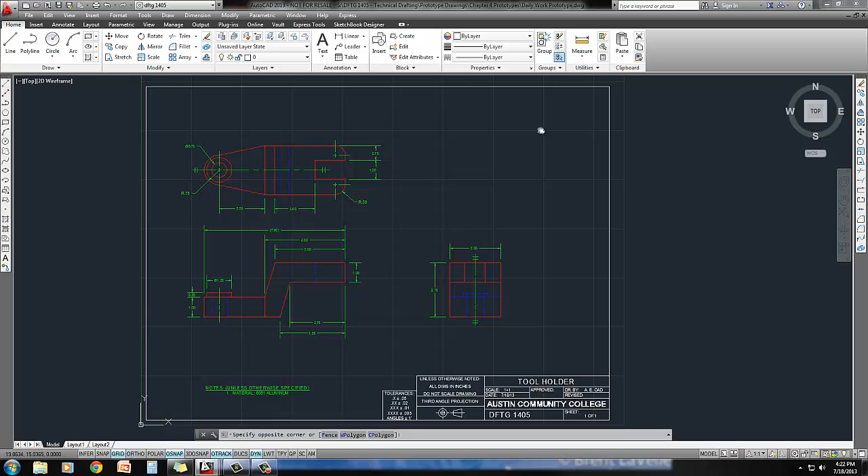And now we're going to move along. Even though the isometric is ultimately going to go right here, I'm actually going to draw it off to the side, just so I have a nice blank area to do it in.

So the book wants me to set up the snap type to isometric, so I'm going to right click on the word grid, go to settings, change it from rectangular to isometric snap, and I also need to turn my ortho on. Anytime you're doing isometric, it is really important to just leave ortho on. You don't want to accidentally draw lines that are not at the right exact angle.

So one step that the book does not have, and this is just something I like to do, so take it or leave it, I like to create a couple of new layers here. So I'm going to create a layer called construction, and I'm going to create a layer called isometric. I'll make my isometric red, and for some reason I like my construction lines to be yellow. I also like to load in a new line type called dot. For my construction lines, you can do whatever you want. It does not have to be dot. That's just my personal preference.

So I'm going to set construction current, come back to this drawing, and step 1 wants me to create a box. This is just going to be a bounding box that is going to be 7 by 2.5 by 2 3/4. So I'll just start drawing a line here.

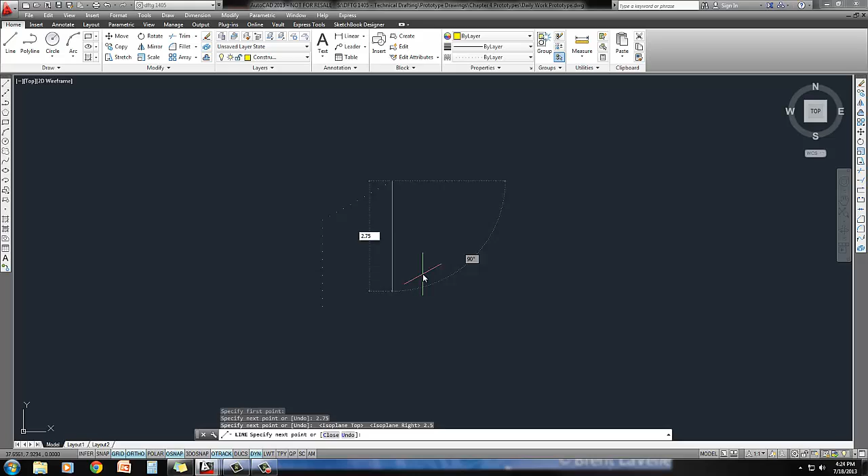I'm going to come straight up a distance of 2.75. Toggle with my F5 to get the cursor to be at the right angle here. So this is going to be 2.5, then down 2.75, and then back over here 2.5, and then I'm going to come over this way a distance of 7, up 2.75, back over 7.

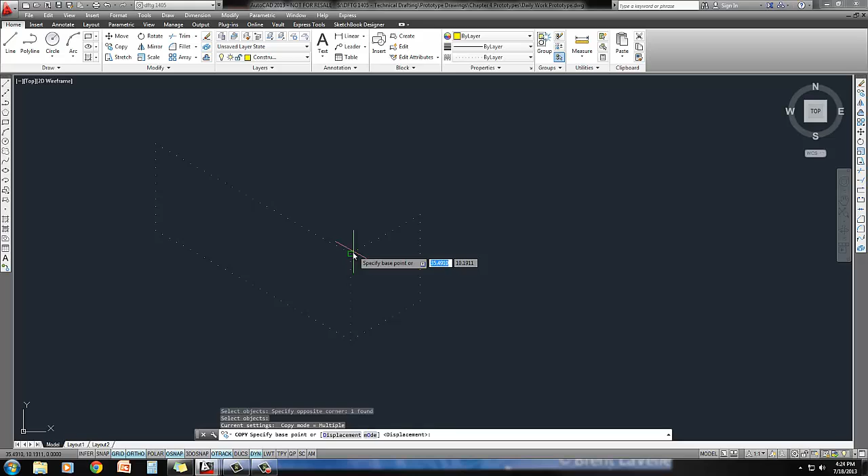And you can either draw those lines from scratch or you could actually use your copy command. So once you've got each of those lines drawn, each length that you need, you can actually just copy what you need straight back. So that's totally up to you. Draw them from scratch or copy them, that's fine.

So now that I've got my bounding box taken care of, I'm going to start constructing the actual object itself. So I'm going to set my isometric layer current and start drawing. So at step 2 it actually has a little picture below, but I do often refer back to the original sketch when I'm doing this.

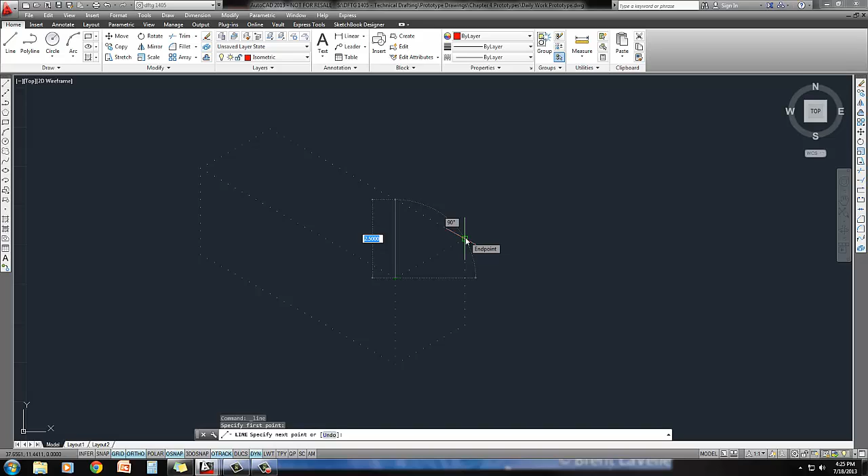So I'm just going to start the line command, and I'm actually just going to draw a little box here. So this is the 2.50. I'm just going to snap from endpoint to endpoint there. I'm going to come back. This top plane is a distance of 3.5, and F5, I'll bring it back this way, 2.5. And then back, I could just do C for close if I wanted. So I've got the top plane right here.

Now I need to figure out, I've got these little fillets on the corners, so I need to do the fillets, and unfortunately when you're in isometric, the fillet command does not work, which is a total bummer because it's a cool command. But what we have to do is figure out where the centers of those fillets are, and then we have to do iso circles and trim them out.

So I'm going to do my copy command. Once again, another command that does not work in isometric is offset, which is a total bummer. That's my favorite command. Anyway, so we're going to come over here.

It says it's a radius of 0.5, so I'm going to copy this line 0.5, copy this 0.5. If you notice, I kind of exaggerate how far out I bring it. I just take it in the direction I want to go, but I don't want O snaps to show up and maybe override what I'm trying to do here, so I pull it way out of the way of O snaps when I do this. 0.5. We're going to come over here, 0.5. Now I've got the centers of all of these little iso circles I need to draw.

So start the ellipse command, I for iso circle, that's going to be the center, and you can either type in 0.5 as your radius, or you can just snap to the endpoint, assuming you did it correctly the first time, your offsets or copies correctly.

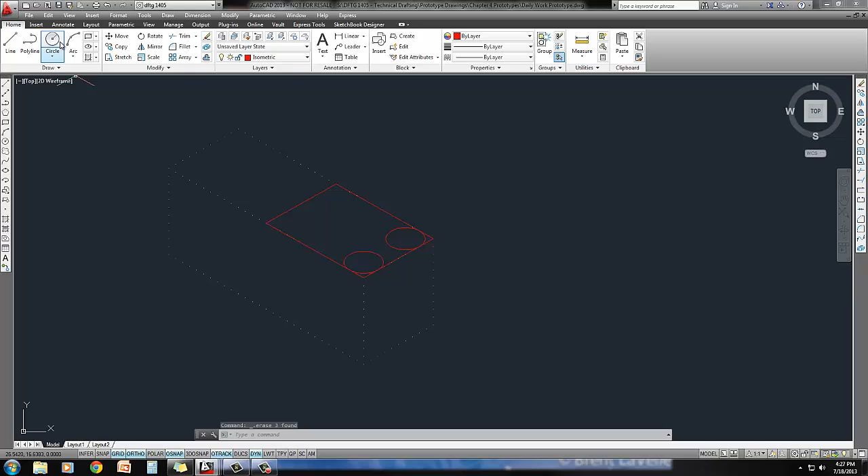Alright, so I've got my little iso circles in there. I'm going to delete out those center lines, and now I'm actually going to come in here and trim, press enter, and I will just trim out these guys. Top's looking good.

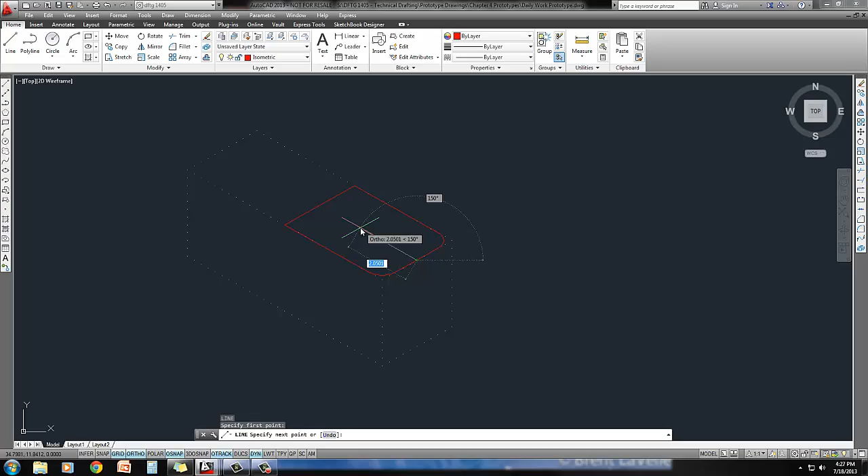There's one more step that I need to do on this top plane, and that's to get this little cutout here. The way I do that cutout is I'll just draw a line straight from the midpoint, so snapping from the midpoint, and I'm going to go back a depth of 1.50.

Then I will copy. That whole thing, that slot has a width of 1, so I'll copy 0.5 in either direction. 0.5 here, 0.5 there, and then I will just connect the dots, there to there. Delete this little guy out and trim that little piece. So my top surface is done.

That looks good. I'm going to just take this whole thing and I'm going to copy it down. So I'm going to use my copy command. And I'm going to bring it straight down, and the distance here is going to be 1. I actually did not need to copy that whole thing, did I?

Go erase out the stuff that I don't need that came in that copy. Trim that. There's one more little line that I need right there. I'm just going to copy one of my existing lines right back there.

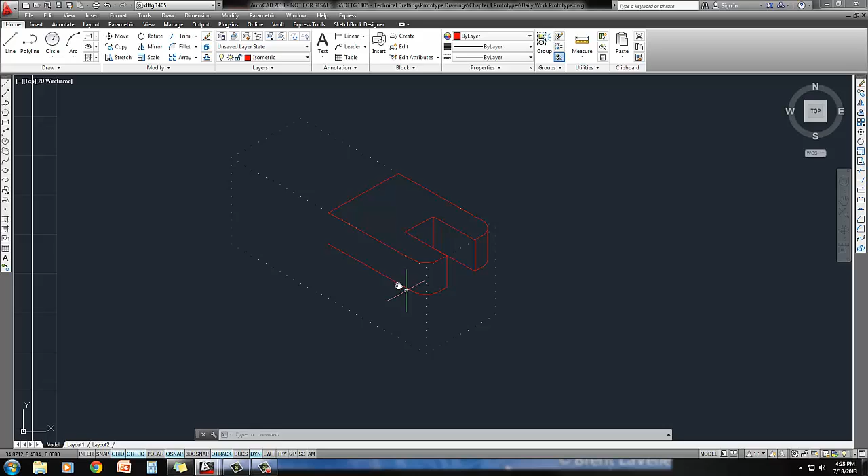Looking good. So now that I've got this taken care of, the only thing different on this side is that this line needs to be shorter. I'll do my copy command and copy one of my construction lines over that distance, 2.75. Now I can trim to that line and erase it, so now it's the right length.

I'm going to keep copying that same construction line to get the rest of the information I need. Copy it over once again, 3.25. That lets me know I'm going to take this line from here to the end point. Erase that one now, don't need it. Copy one more time, 4.

Now I'm going to take a line from here straight over to the end point. I'll come straight up, and that distance is 1, so that left side plane has a height of 1. Then I'll snap it right here to the end point. I don't need that construction line anymore.

If you notice, I like to trim as I go. You guys can do what you want, but for me, the less cluttered I can keep it, the more I can see the object and feel sure I'm doing this correctly. So I like to trim and erase as I go.

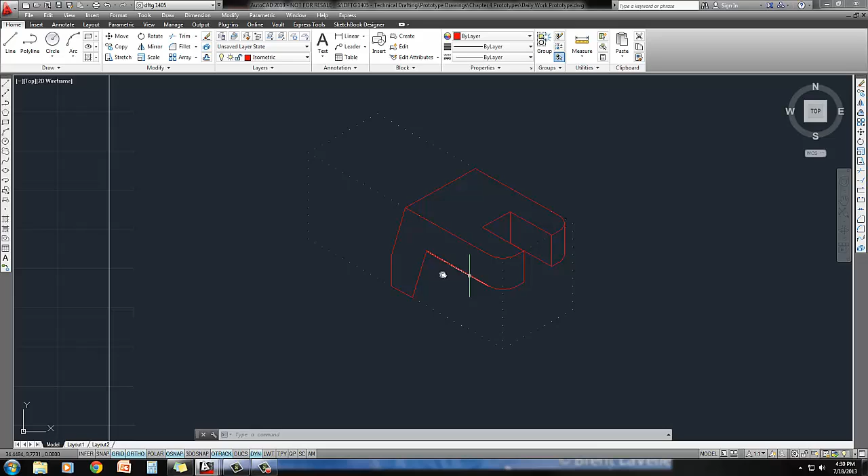I'm missing this line right here, so I'll do my copy command and take this guy, he's already drawn. I like to just copy what I have and trim this out so it looks good.

I'm going to copy it one more time and use this as a construction line. I'll delete this out later because you don't actually see it, but it helps when you're drawing this object out. So starting from this top plane, this is how wide that surface actually is.

I'm going to draw one more line from the midpoint of this, coming straight out. I know it's 2.25 from that point to the circles and arc I need to draw, so I'll make a construction line here that's 2.25. You could even change that to the construction layer so you don't get too confused.

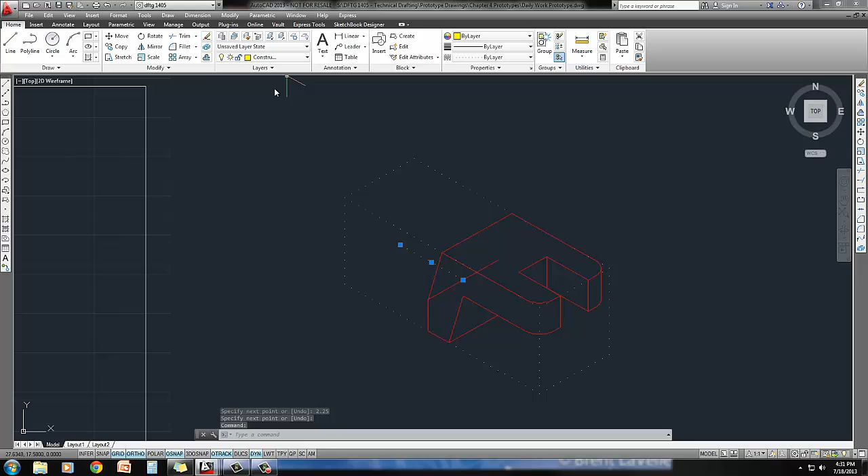I'm going to draw several isocircles. So I've got ellipse, I for isocircle, straight from the end point here, F5 to get the isocircle you need, and the first one I'll do is a radius of 0.75.

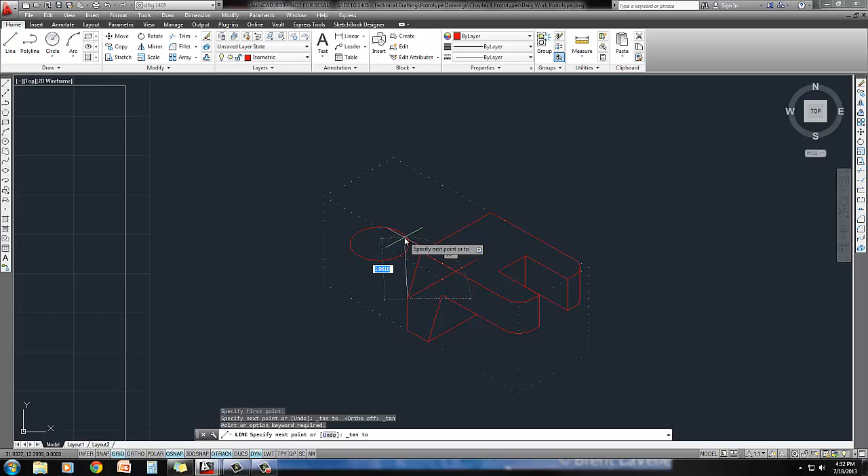Once I've got that, I can draw a line from here. Shift right click, I'm going to go to tangent. One more time, tangent. I do not know why it won't take me to the tangent, see? That one took me to the tangent. If anything, I can maybe just mirror this thing over. Don't know why it won't give me tangent on that one side, but I'm not going to sweat it.

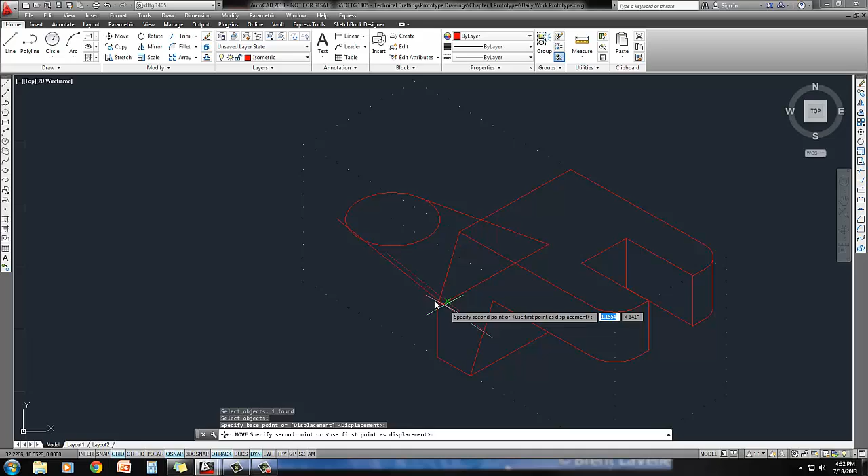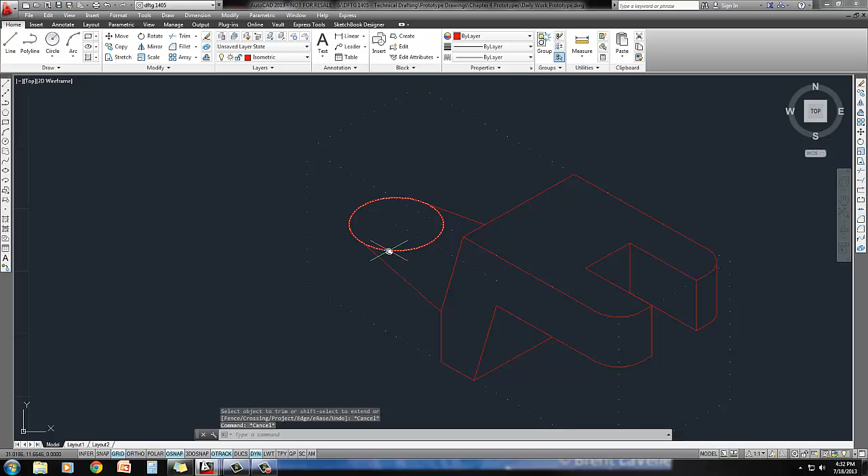I wonder if this will work. No! So from here to tangent, there we go. I don't know why that tangent wasn't coming up for me. I don't even need this line anymore, and I can trim out that back line. Now that I've got this, I can trim out this actually.

Now that I've got this taken care of, I can copy that straight down. My tangent, it just doesn't look right, does it? Draw a line straight from here down, trim out that back, and erase these guys. I've got a couple more circles that I need to do.

So I'm going to do my ellipse with an isocircle, starting at that same center point. This one has a diameter of 1.25. I'm going to copy that isocircle straight up. Make sure your ortho's on, and that has a depth of 0.25.

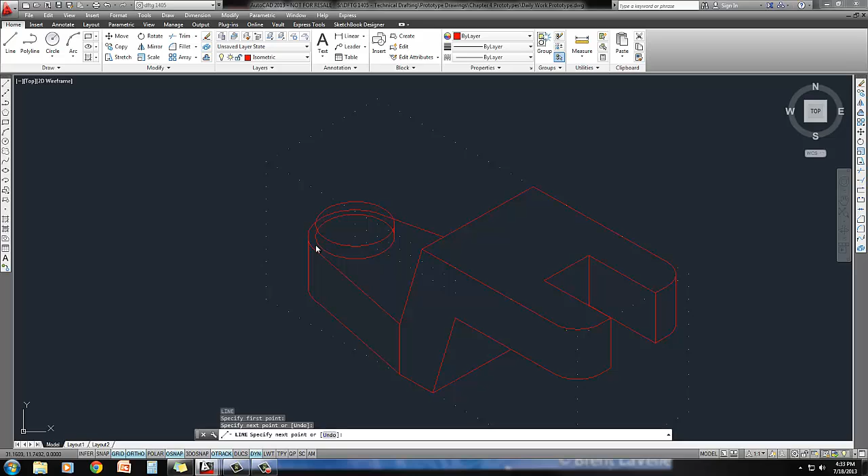I'm going to draw a line from here to here, here to here, and now I'm going to trim out everything that I don't need.

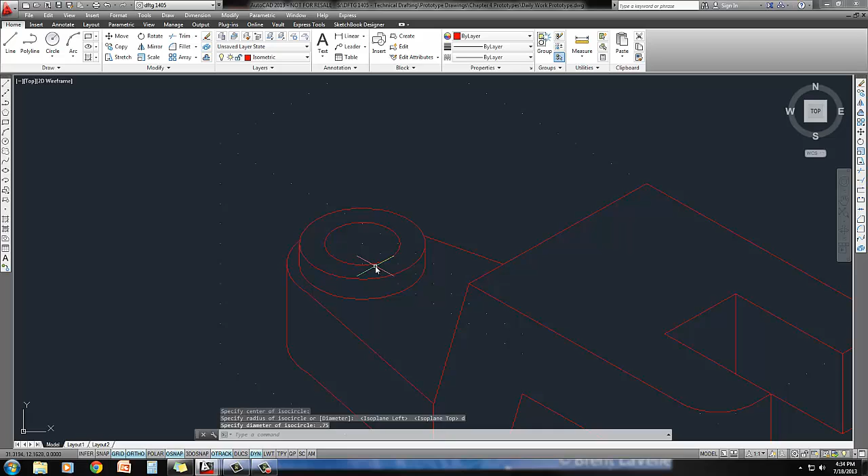I've got one more isocircle to put in here, and that is the hole that goes all the way through it. So ellipse, I for isocircle, and this one has a diameter of 0.75. That's it. I can go in here now and turn off the construction layer, and I've got this guy taken care of.

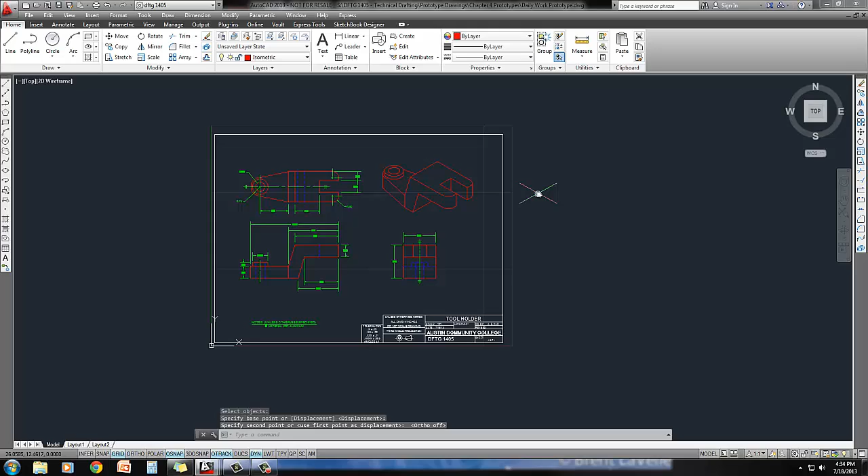I can do the move command, pick him up, turn off my ortho now, pick him up and move him into the little corner right here, and you've got your drawing taken care of. So that's how you do the isometric tool holder.